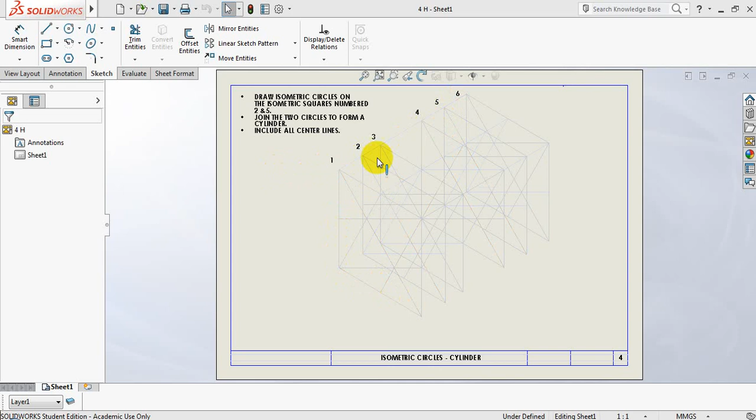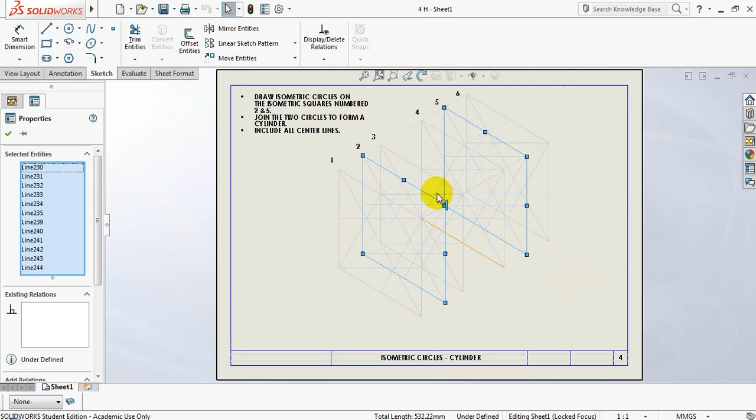Let's quickly try and see or picture where our isometric circles will be drawn. There's our isometric square for number 2. This is our isometric square for number 5. And those will be the two isometric squares we'll be drawing isometric circles in. We do have overlapping squares. This is going to give us an interesting outcome.

Right, let's focus on getting the correct intersection points to work with. All these lines can be quite confusing, but we know that there's a simple rule for us to follow. We're going to go from the obtuse angle of this square to the opposite center. This will be the opposite center of that line over there. We are obviously looking for a V. This will be it from the obtuse angle yet again to the opposite center. It's a nice horizontal line. Very easy to find.

And that is obviously number 2's corner. So we're going to go from this obtuse angle to an opposite center, also a horizontal line. And the other line that we need is going to be this one over here. Right. You'll notice that we have an intersection point there, an intersection point over here. We're going to be using these two intersection points to draw our arcs. Go to my arc tool. I click on the one intersection point. This is obviously going to test whether we know which points to use and how accurately we will use them.

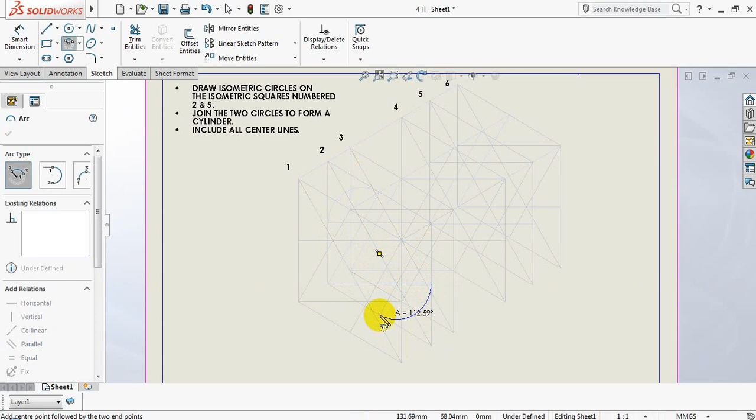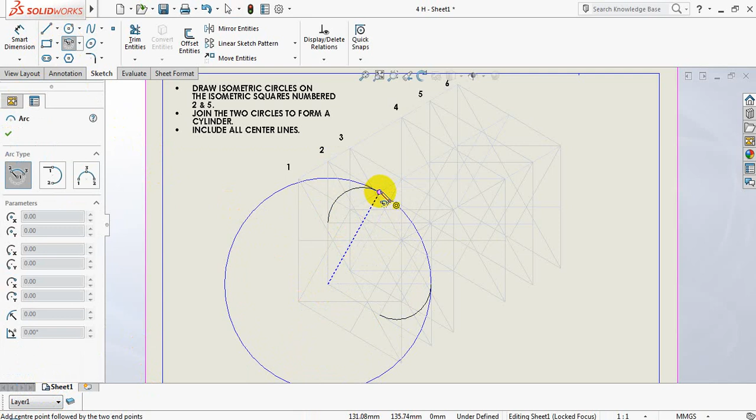There we go. We've got the first 2 arcs. Let's just draw them nice and final. Go back to our arc tool. We know that this is our obtuse angle, which is going to be a nice easy line, because we're going to go from the obtuse angle to this side over here. That side is going to have to join this end over here. And if I find the obtuse angle over here, I will be able to draw my line from this point to that point over there.

Let's just also make these 2 lines nice and dark. I'm going to make them final lines. Great, we've managed to draw our isometric circle for isometric square number 2. That's half of it done. Let's get on with number 5.

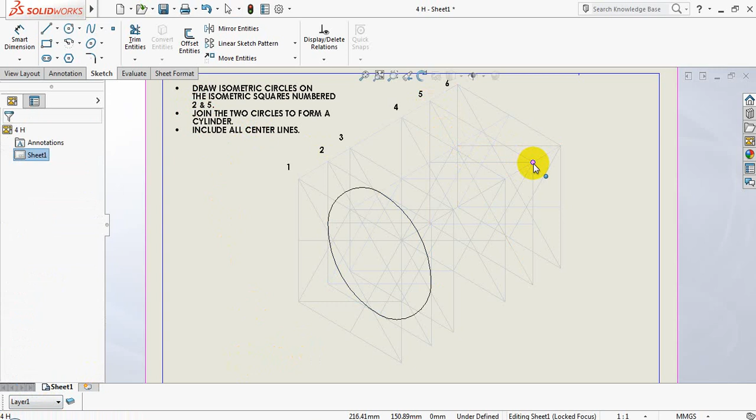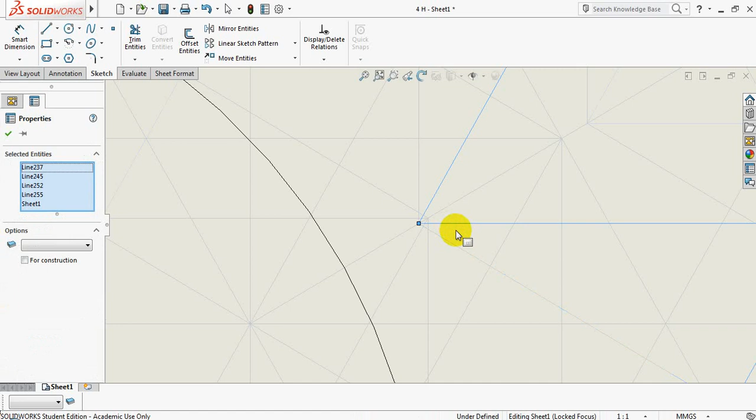Yet again, we're going to go to our obtuse angle. We're going to look for the line going from the obtuse angle to the opposite center. Obtuse angle to the opposite center. And then we need to use the correct obtuse angle over here. So it would be the overlapping obtuse angle to the opposite center. And obtuse angle to the opposite center. There we go. We've got our 2 intersection points.

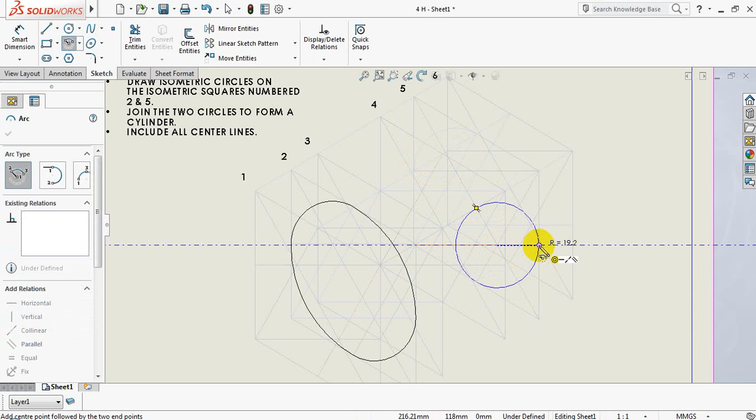Let's use the arc tool. Go to the intersection point. We're going to be drawing from the perimeter over here. There we go. And let's focus nicely here. Where is our intersection point? There it is. From this point over here to that point over there. We could always test our theory. Let's darken these two lines.

Go back to my arc tool, get the correct overlapping obtuse angle. We'll click over there. Just be sure where you'll be putting your compass point.

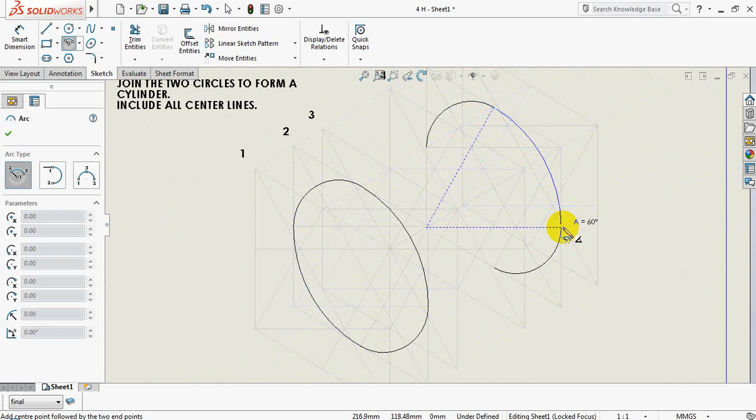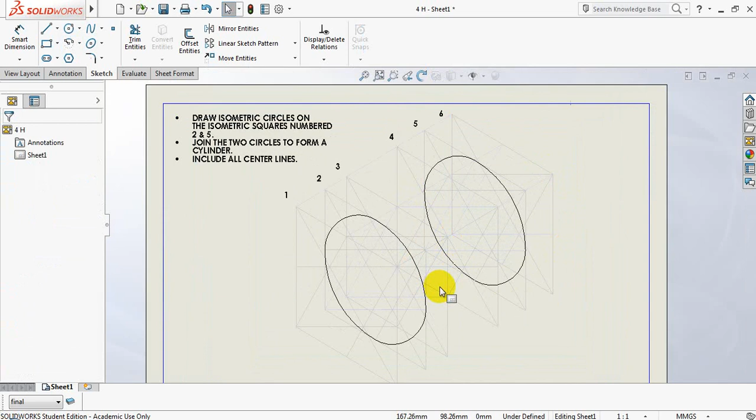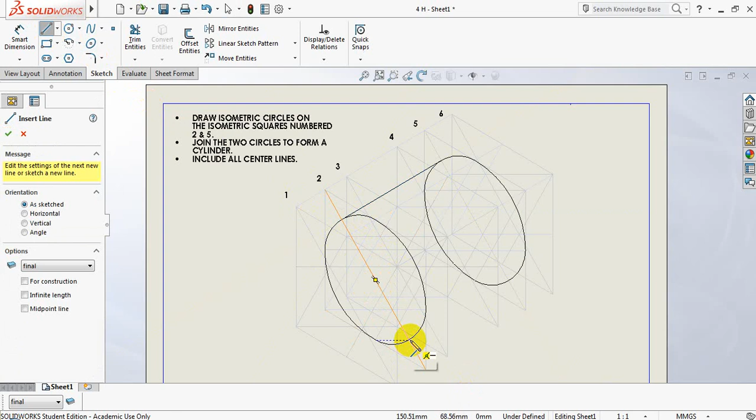Right. Now that we have our two isometric circles, yet again we're going to be joining these two freestanding isometric circles with two lines to shape the cylinder. We know that the longest line that could be drawn is from acute angle to acute angle in isometric square number 2 and number 5. And where it touches the arc, that's where we're going to be drawing our lines from and to. And do the same on this side here. From and to.

We are not 100% finished, because if we are looking at the cylinder face over here, we obviously won't be able to see this, so we'll have to delete this line. And I'm going to use my trim tool.

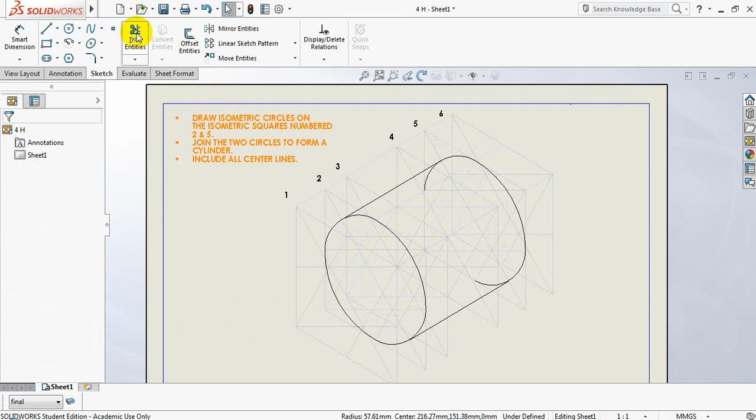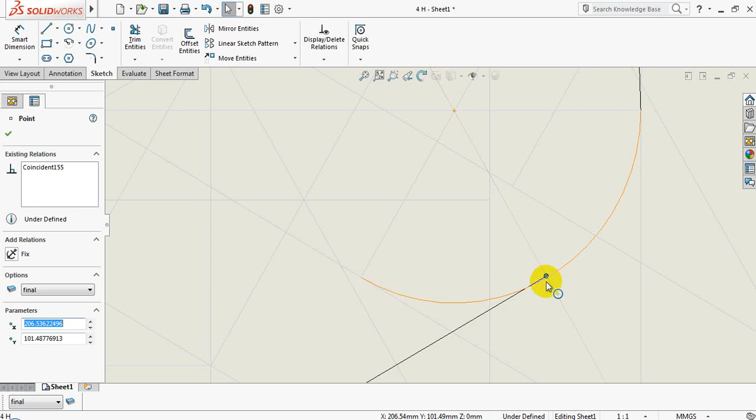Oh, we have a problem over here. We didn't join that properly. Let me see if I can drag and drop that point onto the necessary line. We'll trim that. Computer should have picked that up. Okay, we have an inaccuracy over here. That inaccuracy could be fixed a lot easier on the actual TD board.

And then they want us to include all center lines. We know that each one of these circles will have their own center lines, and then we'll have a center line that runs right through the middle of those two circles.